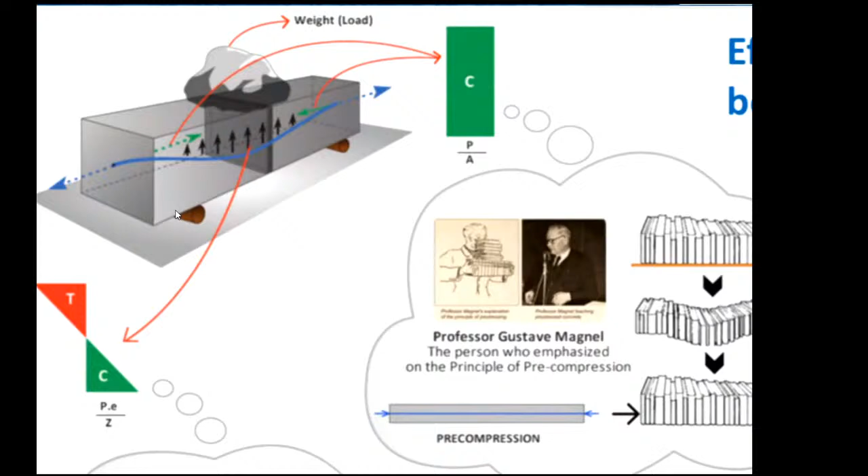Again, the same example with improved, or further advancement in the conceptualization. So here you can see the same beam, and what we are seeing is a blue line. That blue line is nothing but a cable, or you can say pre-stressing cable or pre-stressing wire. Let's understand that part.

So let us understand first this part. This is nothing but what is known as pre-compression.

In pre-compression, what is happening is, let us understand with this example: you have a stack of books like this. There is a bottom platform, and on that platform, the books are resting. If we remove the bottom platform, the book will not be under equilibrium condition, and it will fall down.

So the other option to keep the book in place is to generate a pre-compression in both directions of the book stack, such that there is internal cohesion between the surfaces of the books, and it holds its position. That is the meaning of pre-compression, or the concept of pre-compression. So you are getting a benefit of having pre-compression in your member in this direction. So that is one part.

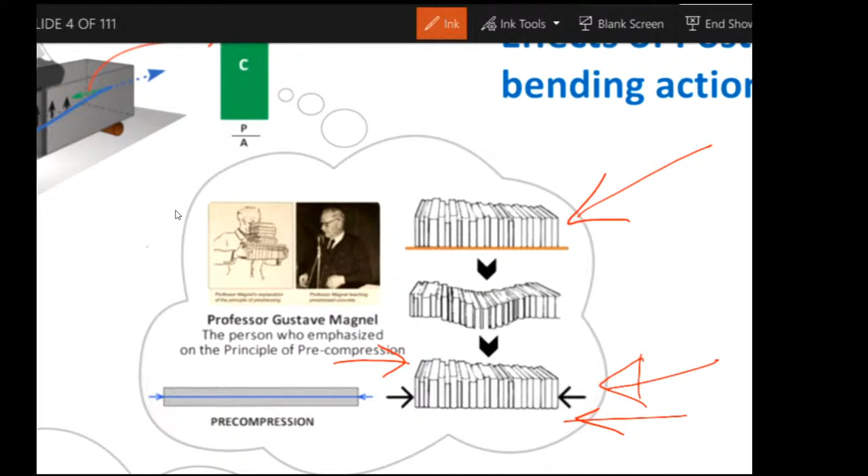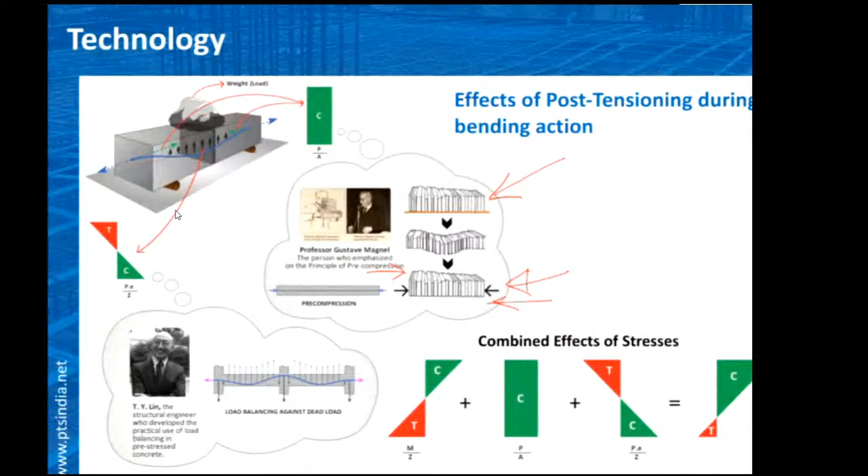Actually, this concept was materialized or thought of by Professor Magnel, and that was the initial first step of pre-stressing. The second step of pre-stressing, or further advancement in the conceptualization, was developed by Professor T.Y. Lin, and he developed the load balancing concept with the same cable.

If the cable is straight, we are getting pre-compression. If the cable has a certain profile, like what you see here, what happens is you are getting additional benefits. When the cable is stressed from both ends, the cable will try to straighten up, and it will start inducing force in this direction.

And again, there is a beauty of that force: it helps us in resisting the gravity forces. Gravity forces are always acting downwards, and the part force of that cable action is acting upward, so it can balance the gravity forces coming on the beam, and that helps reduce the net effect. Again, it has the benefit of reducing the stresses as well as the deflection in the beam.

So now altogether, let's see the entire scenario. What is happening is we are getting this P over A, that is pre-compression through this action. We are getting these kinds of internal actions through this P by this weight balancing action.

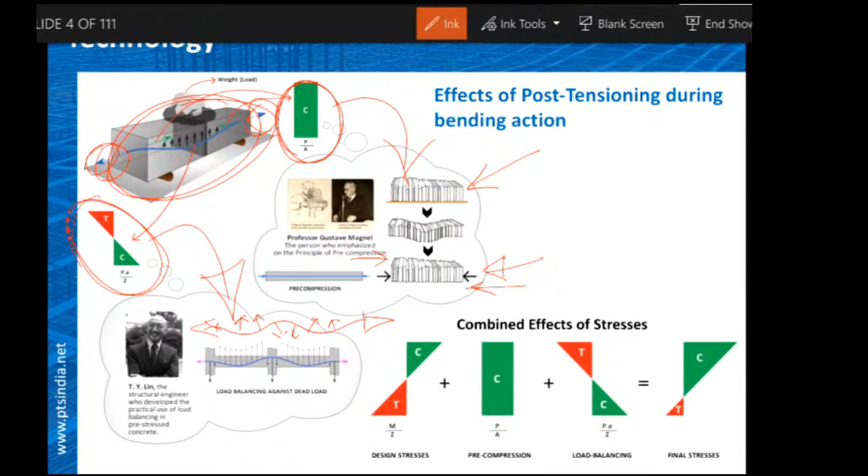Ultimately, what is happening is you can see these are the pre-compression forces. The green arrow is the pre-compression forces. The black upward force is nothing but the weight balancing forces.

So altogether, if we sum up, this is the design stress we get from the loads, or you can say vertical downward loads on the beam, that is moment divided by sectional property Z, or section modulus, wherein you have tension at the bottom and compression at the top at mid span of the beam.

The additional action you get from pre-stressing is pre-compression, like this is the direct stress. Direct stress is nothing but pre-compression force divided by the cross section area A, plus you get the load balancing or weight balancing stress, that is the pre-stressing force into the eccentricity, divided by the sectional property Z.

So in a nutshell, if we sum up the internal actions, the final stress diagram could be like this, wherein you'll have more of C and less of T. Now here you can have control over T and C both, tension and compression forces or stresses in the beam. Here you can make this tension force zero.

You can have the entire section under compression. You can limit this T to your codal provisions and whatever is acceptable by code. You can control the amount of tension accordingly.

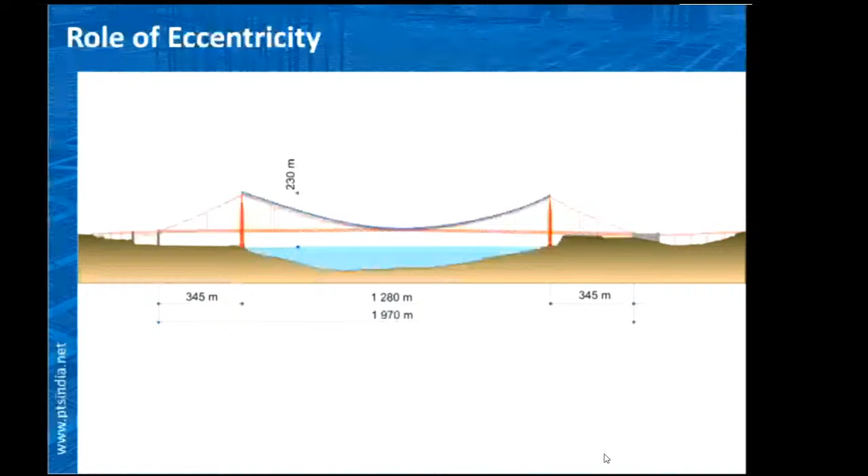So we'll go through this bridge, we'll study some aspects of this bridge. Here the bridge has two piers or pylons, two supports. You can see one is here, another is here, and the span between these two supports, the clear span, is around 1.28 kilometer, or 1.3 kilometer roughly.

Now here, to achieve this unsupported span of 1.3 kilometer, they had to go with a height of this pylon around 230 meter from the mean sea level. So why go with this much height of pylon? That is a question, right?

So actually they wanted to achieve this eccentricity of 150 meter. That was the case. So to achieve this 150 eccentricity of this cable, that is required, or that is the optimized eccentricity, and to achieve that, they had to go with 230 meter height of the pylon.

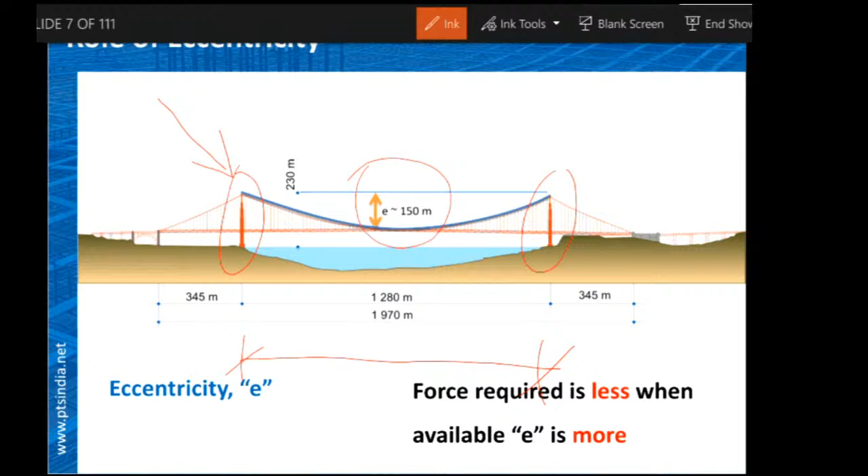Now, what is that? So the height of eccentricity can be realized with the height of a 50-story building. So eccentricity is 150 meter. If you consider 3 meter per story, it is around a 50-story building, just the eccentricity.

And if you think of 230 meter, the height of the pylon, it is more than that, maybe around 75-story building. So why go with that 75-story building height of pylon just to achieve this 150 meter eccentricity? So this is the essence of this bridge, to have this eccentricity. And why this eccentricity? Let's study more on that.

I'm keeping the same eccentricity or same cable, and I'm turning now towards building applications of the same concept.

Now you have a beam, same kind of structure, you can say - not exactly the same structure, but same analogy. Here the same kind of eccentricity, curvature, or profile of the cable is generated in the beam. You have two spans, a particular span and two supports here and here, and maybe you have continuity, right?

So now you have this kind of cable profile, and you know why the eccentricity is required. In case of a bridge, we went up to 150 meters in height of eccentricity. Now the same is not the case in a building, right?

Say this is a beam or slab. Now the client, or we, want this eccentricity, or ultimately the total depth of the member, to be as minimal as possible, right? So if you want to make this as minimal as possible, what happens is we are getting less eccentricity.

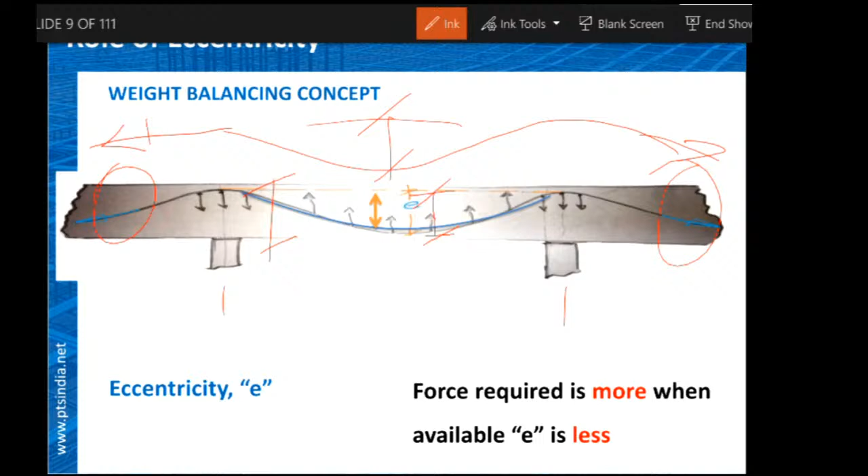And if we are getting less eccentricity, what happens, or what do we need to extend, or what are the limitations in that case? Let's study that part.

So here, a simple experiment - we may have this tool or setup in our laboratory, wherein we have a blue color cable, not elastic, but a flexible cable. And with that cable, there is a pulley here, and you are tying some weight to that cable, right?

And then you are having some weight at the end of this string. So to balance this, to make this system under equilibrium, with this kind of load or force in the cable, and with this kind of force or weight on the cable, there is a certain amount of eccentricity that is set to make it under equilibrium.

Now, what if we need to reduce this eccentricity? The only way to reduce it, since we have a fixed amount of weight, is to add on some more force over here. And if we can have some more force here, then the eccentricity can be reduced. So let's see that.

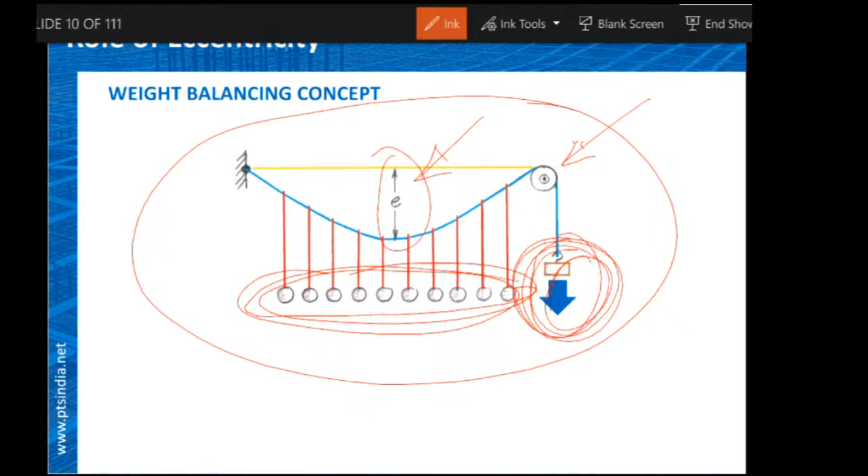So this is the second case, wherein we can reduce the eccentricity by providing more force in the cable, right? So actually what is happening is we need more force in the cable, or maybe we need more cables, to reduce this eccentricity and to minimize the overall depth of the beam or slab.

So that is where eccentricity plays a role. Higher the eccentricity, higher is the load balancing force generated by a cable, and lesser is the force required in the cable. Whereas if lower is the requirement of eccentricity, lower can be the load balancing force, and to make it higher, the force in the cable must be higher. That is how the equation should be.

So now you have the clear picture about all the aspects of the system, or prestressing system. Now,

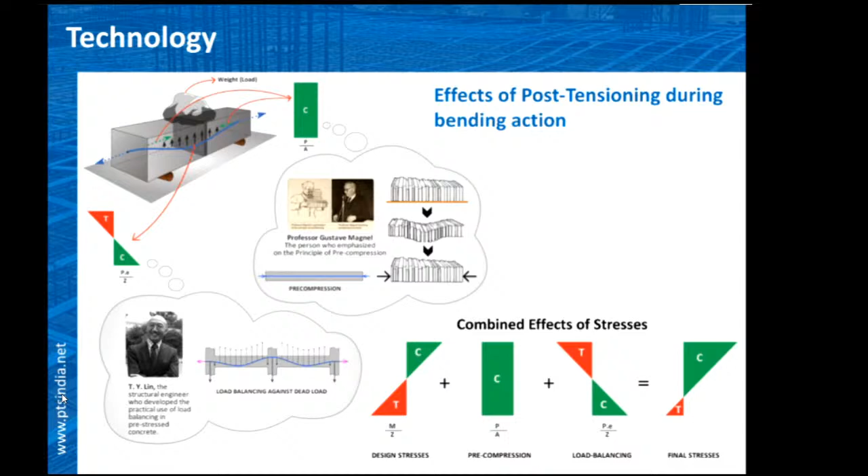there are two kinds of prestressing systems. One is known as pre-tensioning system, which is nothing but you are stressing the cable, or applying the force in the cable, before concrete is cast. That is the meaning of pre-tensioning - you are tensioning the cable before concrete is cast.

The second one is post-tensioning system, wherein you are stressing or pulling the cable, applying the force in the cable, after concrete has reached its desired strength. So after the concrete is cast and poured, we need to wait for certain days, and after the concrete has reached its desired strength, we stress the cable - the force is applied to the cable after casting. So this is the basic difference between pre-tensioning and post-tensioning.

Pre-tensioning has its own limitations of dimension of the elements. It is generally used in short size elements, and generally used in a controlled environment where you have a high strength, high force resisting system, because you don't have concrete to resist the force. That force, when applied without concrete present, must be resisted by some other strong system, which may not be feasible to achieve on site. That's why pre-tensioning is generally factory made or carried out at a controlled place. But that is not the case with post-tensioning system.

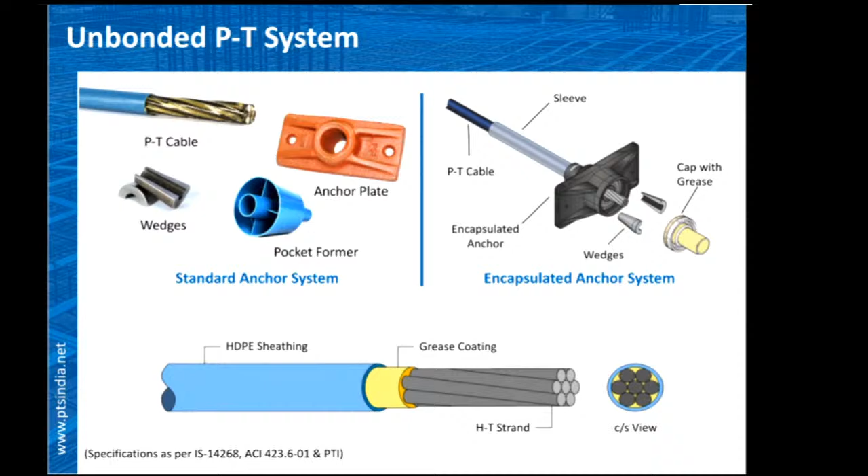These are the nuts and bolts of the unbonded PT system. There is a PT cable, an anchor plate, a pocket former, and wedges. All this sums up the anchorage system, and this PT cable runs throughout the member, either a beam or slab. This is known as the standard system, whereas there is another enhanced system known as the encapsulated PT system, wherein everything, even the metal part, is covered with plastic polyethylene or polypropylene sheathing, or encapsulated throughout. So nothing, no metal part, is exposed, and everything is covered with plastic sheathing. It is known as the encapsulated PT system.

Below is the structure of the cable. More precisely, the cross section view is like this, wherein there are 7 wires made from high tension steel grade, with a grease coating on it. This grease has two properties predominantly: one is to protect the cable from corrosion, so it's an anti-corrosive grease, and it also allows the sliding of the cable while stressing, reducing friction. So it protects the cable and provides less friction while stressing. On top of that, it has an HDPE sheathing.

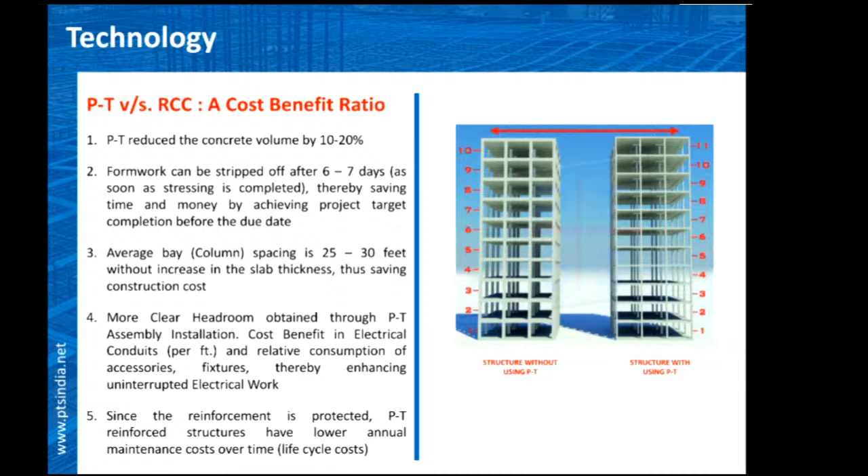Let's discuss the brief history of post tensioning. In 1886, the first patent was issued to P.H. Jackson of San Francisco. Then in 1928, Freyssinet tried to play with this concept, and used high strength wire and concrete, starting this in France. Then in '39, the same person improved it further, trying conical wedges and special jacks, developing something to anchor the wires in 1939.

Then there was a red dot in history: World War II, during which there was a wastage of steel infrastructure. Everything was washed away, even buildings, roads, bridges. After World War II, there was a huge demand for reconstructing infrastructure, buildings, roads, everything, while the metal had been wasted carrying out the war. So there was again a scarcity of material and a huge demand for making these structures. That's why post-tensioning came into the picture again, because it was actually saving material.

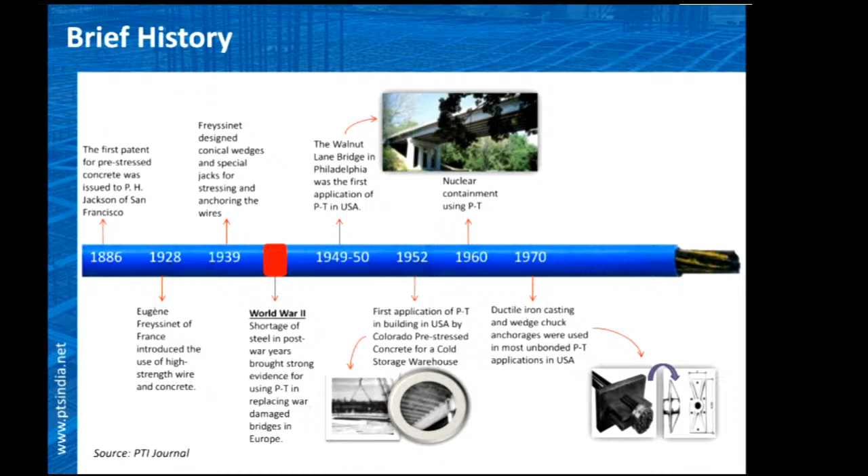In the 1970s, there was a development on the metallurgical engineering side in casting, which helped us make an efficient anchorage system by casting. In 1976, PTI was formed in the USA. This Post Tensioning Institute is a regulatory body that makes criteria, standards, and specifications related to post tensioning. We are following this PTI body in our system.

These are some of the state-of-art developments, many of which I have already discussed. One of them is that specifications were made for the unbonded PT system, so it is a well-specified system. The second is the system of extruding plastic sheathing. Whatever structure of cable you see right now is the same thing - the extrusion of plastic sheathing around the greased strand was developed to have this kind of extrusion system.

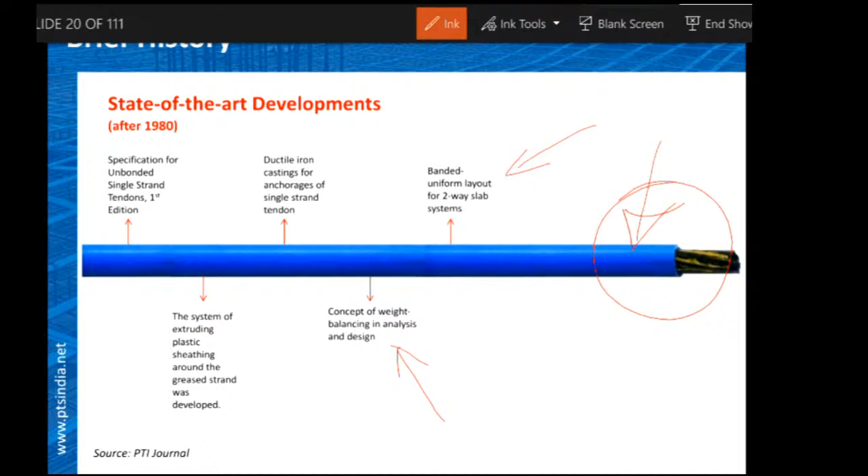Then ductile iron casting on the metallurgical side was developed, which helped in preparing an efficient anchoring system. Then the concept of weight balancing - we'll see this in one of the forthcoming slides. Banded and uniform systems - we'll also see this in some slides. Then computers came, and they excelled our analysis and design compatibility capability, as well as efficiency and speed. And finally the encapsulated PT system, which we've seen to work against corrosion.

So this is how it looks like. This is a typical or schematic layout of an unbonded PT system, wherein part of this is already cast with the PT system, and there is a construction joint here. After that construction joint, this part is yet to be cast. The laying of PT is already done, some steel is also there, and this cable is coming out from the already cast portion. This cable is also coming out from the already cast portion. There are cables in the cast portion like this.

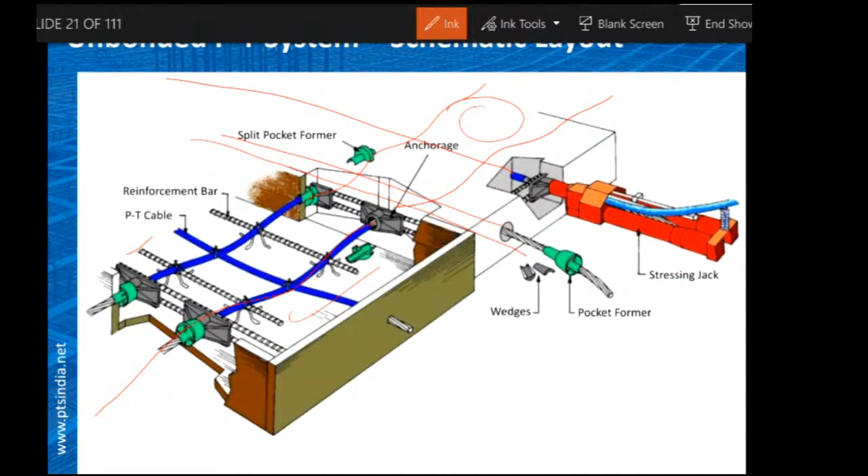So now, after having sufficient strength of the cast concrete, we are preparing it for stressing. We remove the pocket former, apply the wedges, and then apply forces through this stressing jack, pulling them out with a certain amount of elongation and a certain amount of force, and then they are self-locked with the wedges once the force is removed. So inside there is a force in the cable, and after stressing, we cut this excess length of the cable, and everything is flushed in. Nothing is taken out of the face of the slab.

These are the real photographs of the system. If you see this, this is the side of the slab or beam. This is a pocket former. This is the anchorage, and the cable is taken out. This portion is for the stressing part. Once the stressing is done, this portion will be cut. You can see the yellow part in this - this yellow part is nothing but the grease. This is the inside view, and you can see these are the cables.

The group of cables are separated out at the anchorages, and then every cable is treated individually. That is why it is known as the monostrand system - each cable has its own anchorage system associated with a single unit. That is why it is known as the monostrand system.

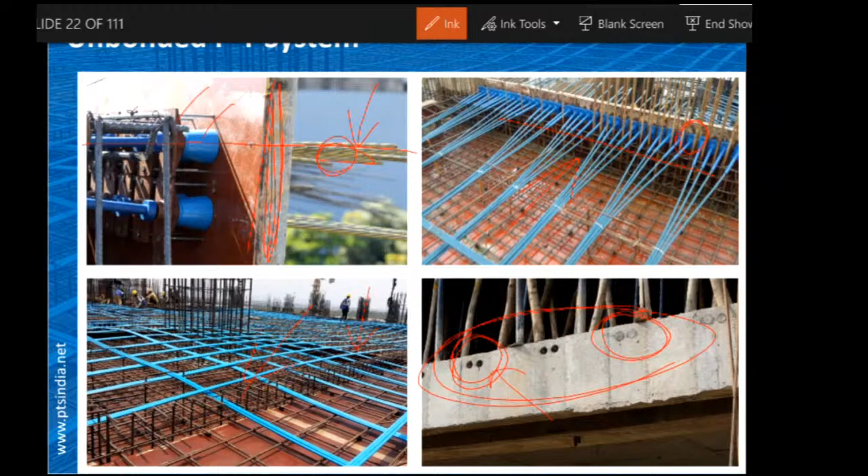Let's see some of the applications in residential projects.

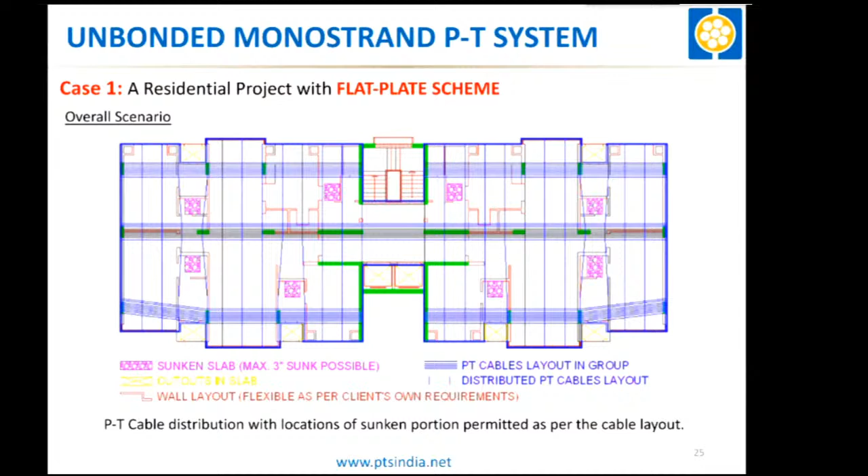So here in this scheme, this is a flat plate scheme wherein you may be able to see the perimeter of the slab, and whatever green part you see, these are the supports. You can see these are the supports, here also there are supports. So the green part is nothing but the columns or shear walls, or you can say structural walls.

So here actually there are very few beams. Maybe there is a beam here, there is a beam here, like that. So the beams are placed in such a way that they are not hindering the ambience, or you can say the space or working space. There is no beam inside this portion.

So it's only a flat scheme, and you can see the laying of the cables being done in a distributed and banded scheme. So horizontal cables are being laid in a group, and vertical cables are being laid in a distributed way, with uniform spacing or something like that. So this is a uniform and distributed cable layout.

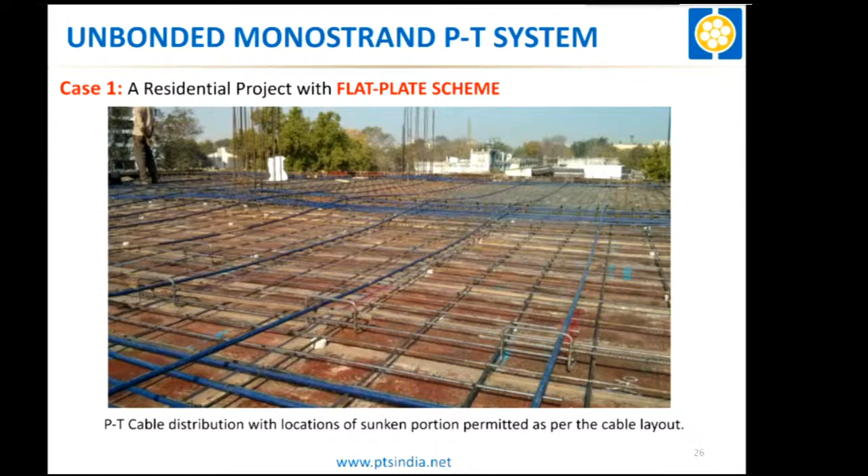So here you may observe that the cables are at a high point here, then again a low point here, right? So this is a high point, again low point, like that. High point, low point, like that, and this cable also high point here and low point here. So these are the cable profiles required as per the site, as per the design requirement, and this helps us in inducing the weight balancing as well as the pre-compression from both the ends.

This is the project wherein the floor to floor height was 10 feet, and you can see that the support and slab directly, there is no beam.

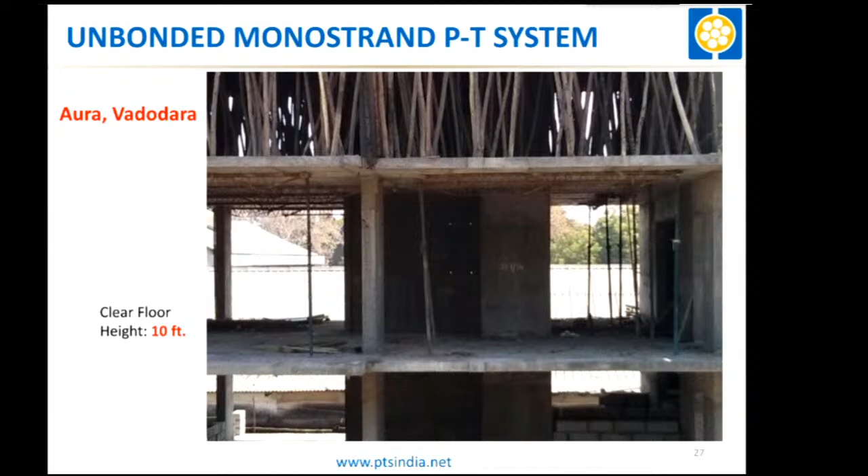The other is flat slab with column drop panel. This is another scheme which may be used in commercial or residential projects as well. As you see here, there are drop panels like this, surrounding the column, and there are a few beams here. So the beams are as per the requirement of the structural consultant.

We are working with the structural consultant. We only concentrate our design on the post tensioning part, and the other part is taken care of by the structural consultant, like columns and beams, maybe RC beams, or shear walls and footing — all these things will be designed by the structural consultant, and horizontal members, PT members like beams and slabs, will be designed by us.

So here the span could be like 10 meter or 12 meter or 11 meter from column to column. To achieve that span in an RC case, the deflection will govern the design, and you must have the thickness so that the deflection is taken care of in case of RC. But in case of PT, you have the benefit of controlling the deflection — that is why you can reduce the depth of the slab and the depth of the overall floor plate.

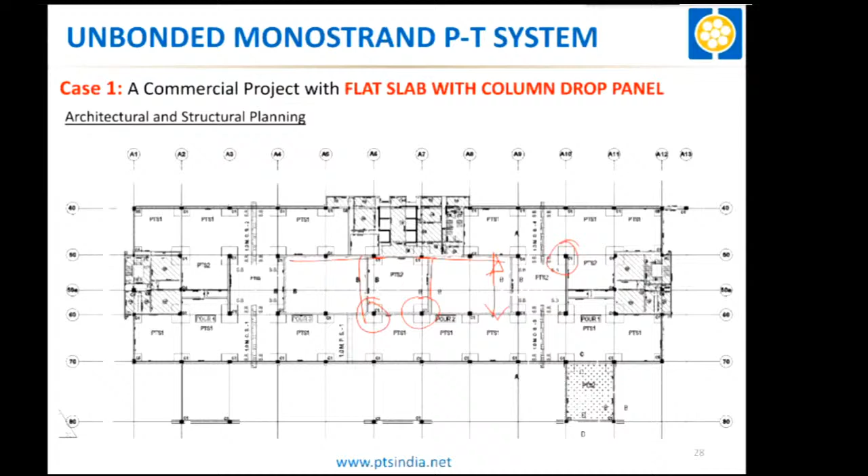When you have a larger span here and a lesser span in this portion, you may require more cables in the larger span, so we may put it like this.

This is once the casting is done, stressing is done, and when the shuttering is removed — this could be the scenario or the ceiling of the PT slab. This is known as flat slab with drop panel. You can now easily view the drop panels around the column.

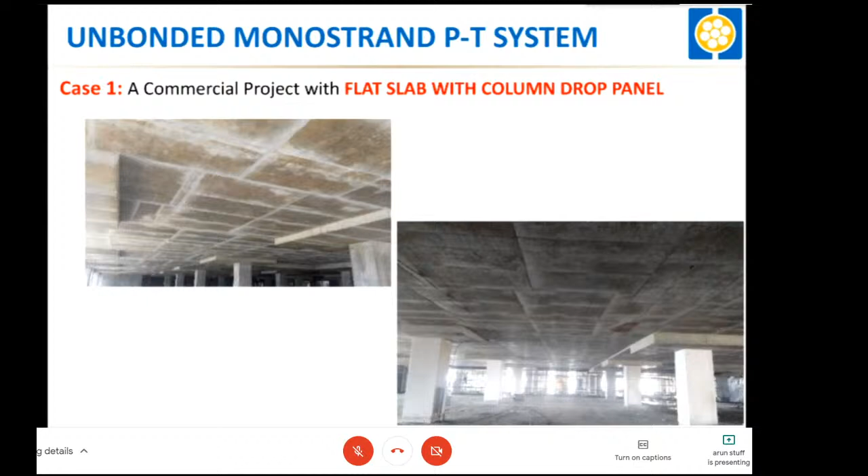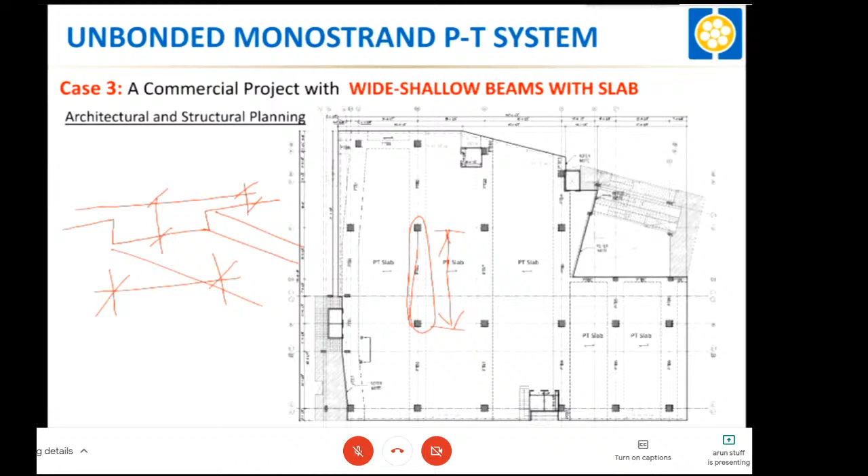This is another project wherein the client was having columns here. There were columns here, and the client approached us saying he wanted a better working space in this portion, but he did not have any issue with the height of the building and height of the beam.

So what we tried is to keep the same height of the beam that he was having with RCC and with these central columns. In RCC he was having a certain height of the beam. So keeping that particular height of the beam, we tried to remove this entire row of columns, and the client appreciated that, and we moved forward, and this project was materialized.

Now you can see the beauty that there is no column inside the building. It's the freedom of the client that he can make anything in this unobstructed area.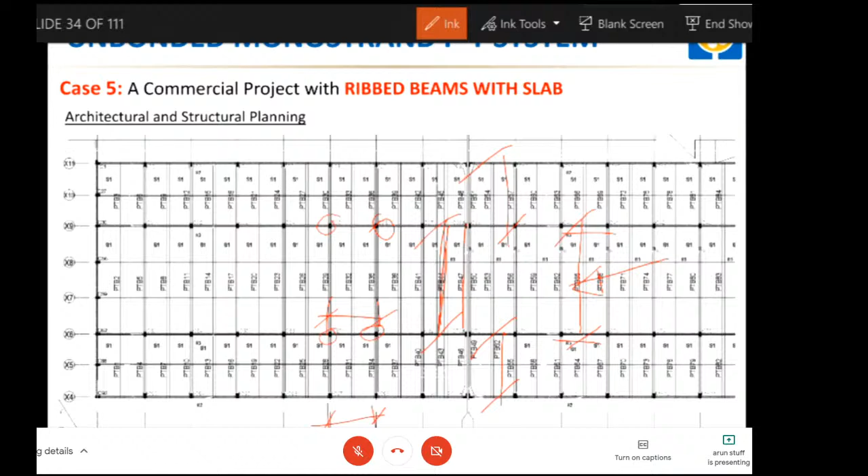This is a very interesting geometry known as a waffle slab. You can see these are the columns, so there are total 8 columns, there is no inside column, it is all columnless space. The span between these columns from inside to inside, or center to center, is around 124 feet, and here it is 120 feet. So it is 120 feet by 124 feet spanning.

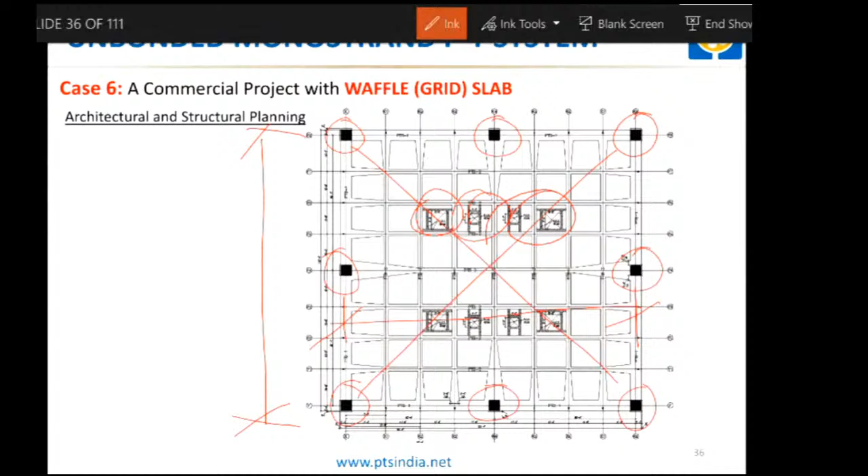And these are the cutouts inside the floor, or you can say the roof of this building. This is a very special structure, and it has already been constructed. It was actually the largest flat roof in the world, awarded by Guinness World Records, and it has that record of having the largest flat roof in the world.

And this is in Jaipur. It's just adjacent to the Govind Dev Ji temple, which is a well renowned temple in Jaipur, near the Hawa Mahal, just beside that. There is a Raj Mahal of the king of Jaipur, and it was managed by the king, and now it is managed by the government of Rajasthan.

They wanted to have this kind of satsang hall just near the temple, and the restriction was the overall height of the building. So they wanted to keep the overall height of this building lesser than the height of the temple, and with this span, they were not able to manage with RC or RCC. So then they approached us, and we proposed them this geometry, and it worked out, and then it went well.

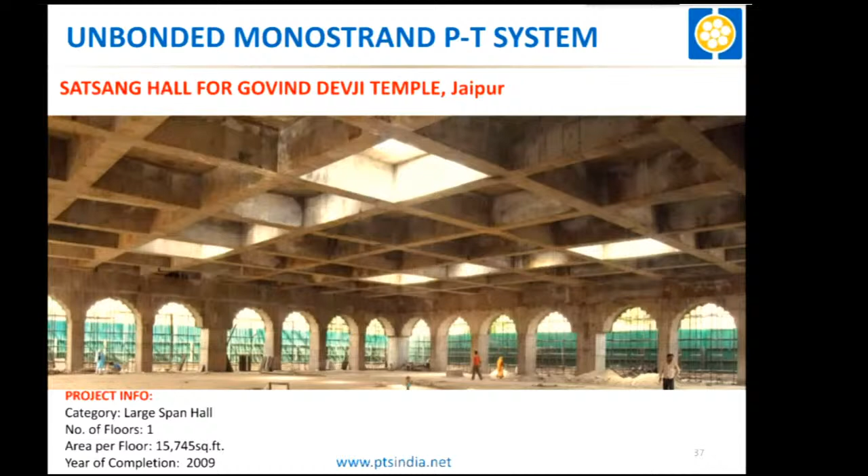So this is the image of the same structure. Now you can see that there are only 8 columns. Whatever else you see are the architectural effects only. This is the real column, this is the real column, this is the real column. These are not the real columns. These are just architectural aesthetic members.

So it is completed in 2009. The loading above this is like, it has a 500 kg per meter square load with which it is designed, so that even a gathering above this floor can be allowed. So it is designed accordingly.

Let's see some of the technical part. One of them is serviceability. What is the meaning of serviceability from a designer's perspective? So these are the points, the aspects we need to look after while designing the PT member or any RC or any member.

So one is the deformation or deflection. It should not be beyond the limit permitted by the code. Cracking as well, there is a limit, so it should be limited with that cracking part. If this cracking is limited, then durability can be managed by reducing the cracking. The other part, like impermeability, vibration, acoustics, thermal insulation, these are secondary parts, but these are being taken care of by some other agencies.

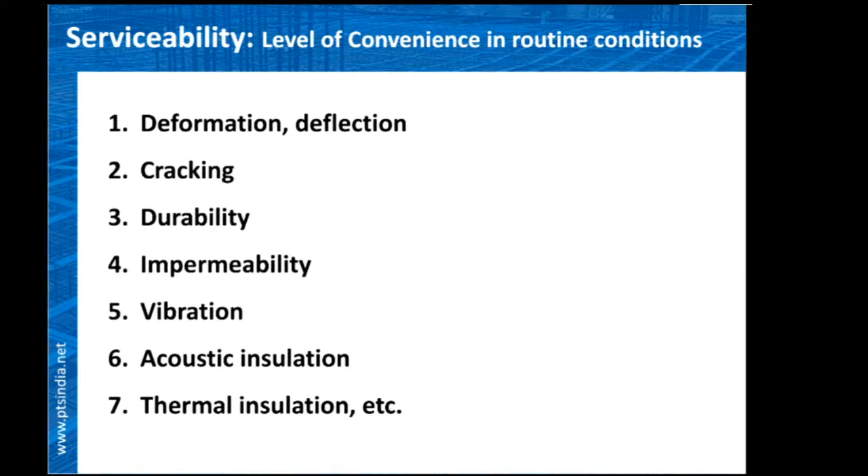So actually the serviceability is expected to remain effective throughout the life of the structure, because the structure should be serviceable enough so that it can be made use of, right? So to have this, structure serviceability criteria should be addressed while designing.

The other part is strength. As a designer's perspective, once the serviceability is confirmed or made sure, maybe we can go with the strength aspect later on. So in strength, its occurrence is very rare. So actually the serviceability or strength aspect arrives at the last stage of the member when it is about to fail. Serviceability parameter exceeds the limiting range.

Now in strength aspect, it is expected that now the structure is not serviceable. It should deform excessively. It should show the cracks, it should show the extensive deformation, noticeable deformation, so that we can foresee, or we can notice that it is about to fail, so that we can save human life.

So both are contradictory actually. In case of serviceability, we don't want the structure to get deformed. We don't want any cracks in the serviceability criteria. But in case of strength, we want that the structure should crack. It should show enough amount of deformation. It should deflect before it fails. So we need to design for both these extremities.

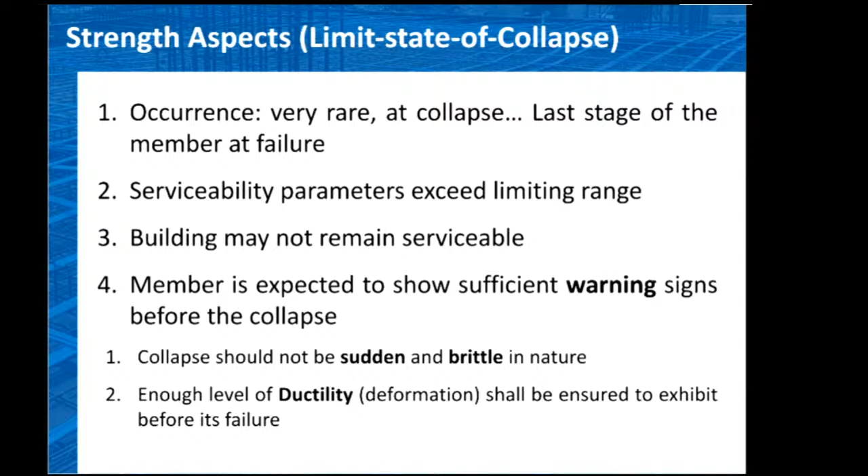So let us understand how to achieve both strength and ductility. So here, if we see the material characteristics, the characterization of the material, we are using HYSD steel. Initially, we were using mild steel. You can see here the stress versus strain diagram of mild steel. It is well known to us.

One step ahead is the HYSD steel. We are working right now with HYSD steel, which has more strength than mild steel. Right? So now we are working with Fe500 steel, that is here, and one step beyond, you can say, is the pre-stressing steel. So we are jumping from this to somewhere here, 1860, right?

So we are gaining much as far as its strength is concerned, but we are losing something as far as its strain is concerned. So here, the strain aspect is this much only. So strain has a relationship with ductility. If your reinforcing steel has more strain while failing, it will add ductility to the overall structural behavior.

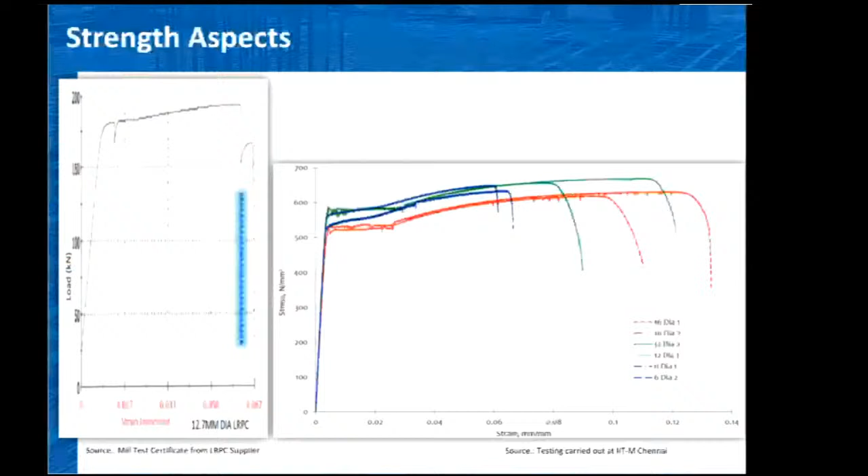So here, actually, we are losing the strain aspect or ductility aspect while using the high strength material. Let's compare both things: one is the stress versus strain diagram of PT cable material, and this is the normal reinforcing steel, HYSD or maybe 415 steel grade, stress strain diagram.

So the peculiar thing is, this strain when PT fails is hardly 0.06. It fails here, but our steel goes up to maybe double of that, 0.12. So we need to make sure about that, and take care of this part in our design. What is the resultant effect of this kind of strain characteristics in the overall scenario? These are the combined graphs of PT as well as normal steel.

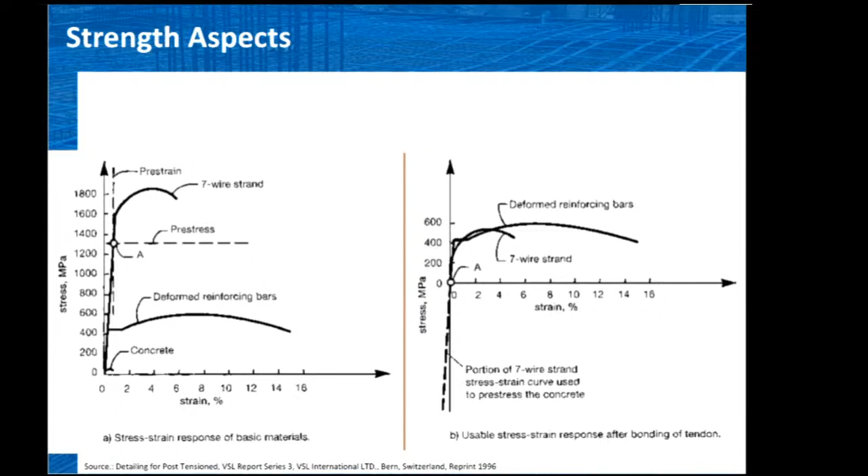Let's understand this part. If it is a bonded PT system, then the prestressed tendon is bonded with the concrete, as well as the reinforcing bar is also bonded with the concrete, and both will be at almost the same level, nearby the tension face. So in case of strain compatibility, everything has the same strain level at a certain level of stress, or at a certain depth of the member. So in the mid span of the beam at bottom, maybe the cable, reinforcing steel, and concrete will have the same strain level. They will have different stress levels but the same strain level. That is the meaning of strain compatibility.

So what happens when strain compatibility is there? When the strain increases to the extent at which the bonded PT cable fails, there is a sudden change in the transfer of force, and now the force experienced by the reinforcing bars is more, and there can be a sudden failure of the structure. This case is expected in a grouted PT system.

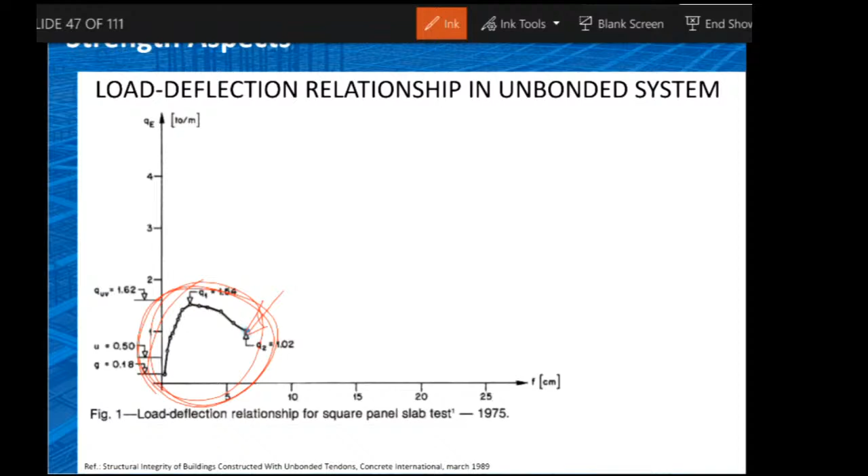In case of an unbonded PT system, the beauty of making it unbonded is like whatever you saw in the last slide - this is the same thing here. This is the stress strain diagram of a bonded PT system, wherein it fails in this portion. But in case of an unbonded PT system, it goes further before it fails - it is about to fail at this point. The strength part is very, very high, as well as the deformation part.

So this behavior is known as catenary action. You can search on Google regarding catenary action of unbonded PT systems, and you'll get to know how beautifully it can help us achieve ductility as well as a greater amount of strength. So the ductility part in unbonded systems is what we saw right now.

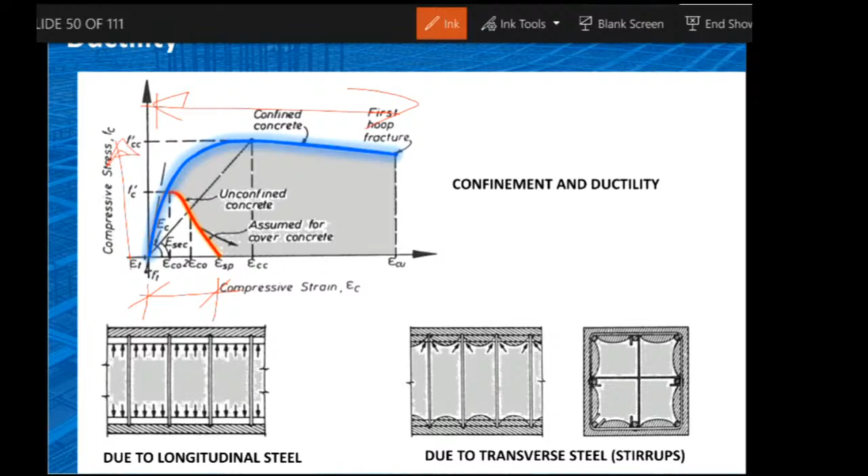But in a general scenario, ductility can be managed by confining the concrete. This graph of stress versus strain shows the behavior of unconfined concrete - just watch the strain part, it is this much when concrete is unconfined. But when the concrete is confined, this is the graph. It improves a lot as far as strength is concerned, and as far as strain or ductility is concerned - you can see it is enhanced just by confining the concrete.

Confinement can be achieved with the help of longitudinal steel, and more so with the help of transverse steel, that is nothing but the stirrups. By having a good amount of stirrups well specified in accordance with the ductility code, IS 13920, we achieve a good amount of ductility required to take care of the lateral forces. So that can be managed with the help of this kind of steel.

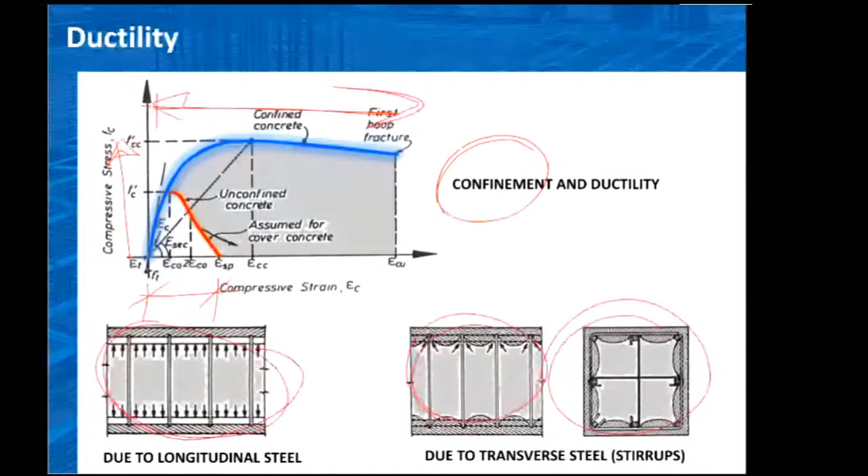Now let us think all together and superimpose everything. So this is the scenario - these two thick black lines represent the envelope of the moments, wherein the midspan portion is controlled by gravity moments, whereas near the column-beam junction, there is partly a gravity moment as well as lateral moments.

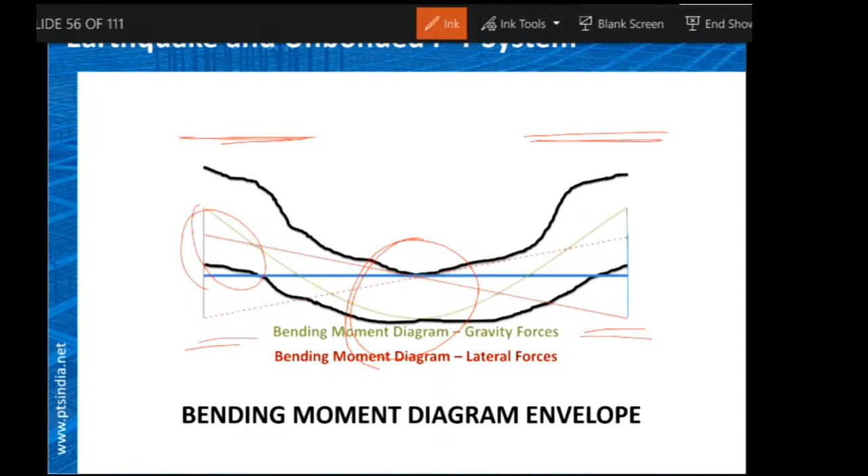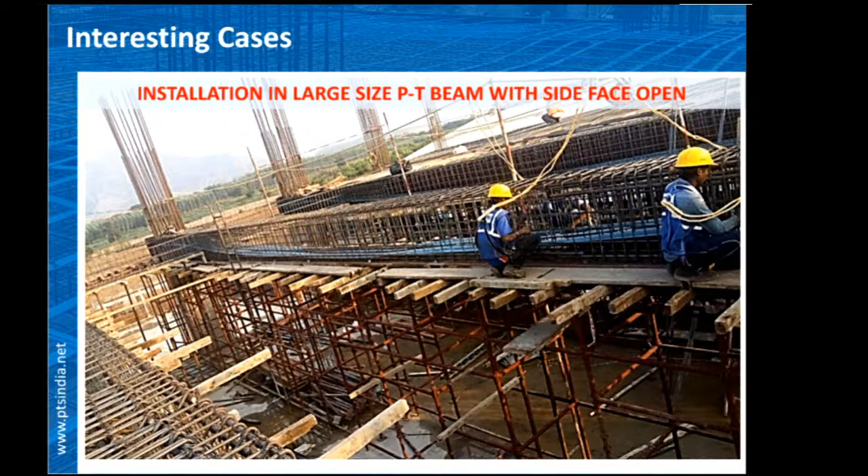This is the installation of an extra large size PT beam. You can compare the height of the beam with this person - it's more than the height of the person. Also, you can see the cable profiles - these are the profiling of the cable. Actually, this project was in Baroda, and this is Nilambar, one of the projects of Nilambar, near Vasna Bhayli Road, Nilambar Circle, where there is a Hyatt Place Hotel.

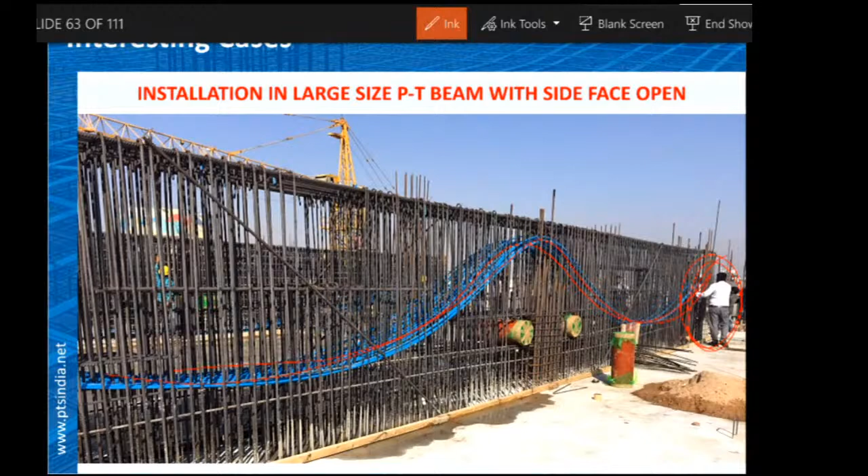This is a project of Nilambar Triumph, wherein they had a transfer of structural systems from one of the floors above the ground floor, maybe around the 6th or 7th floor. They wanted a different structural scheme above this level. So this is a transfer level, and this is the transfer beam, wherein certain columns come onto this beam and are not going below it - transferring the force from those floating columns to the main columns from this particular floor. You can see the end of that beam, where a series of anchor plates are arranged with a particular profile.

This is the same beam after having cast and stressed, and the cables are cut. Now it is about to fill the recess, these black pockets. Once that is done, everything is over and you can move forward. So this is how it looks like afterwards.

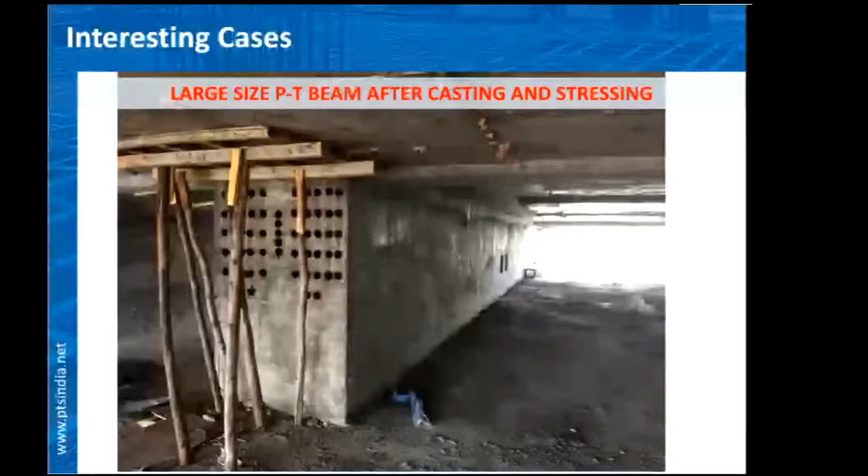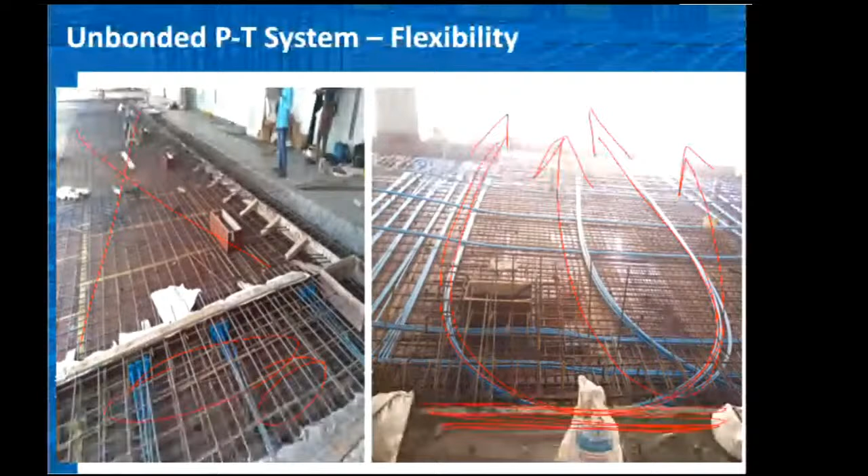This cannot be done with other systems like bonded, because they have a flat duct, and that duct cannot be bent in this horizontal direction.

You can see the other views. The cables are being laid in this direction, and these are actually stressed from this side. So it is a very flexible system.

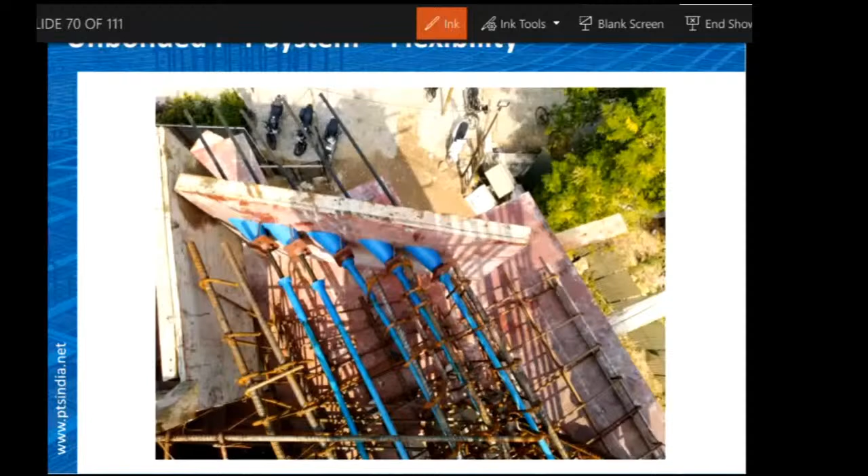You can see some of the images. Here also you can see that the face is not orthogonal to the cable - it has an inclined face. So again, the cable force is in this direction, right? You can see that there is a mechanism to take care of this inclination in this system.

Now, extending a PT beam - you already have a PT beam, and if you want to extend it, these are the PT beams. This is a project of Hiranandani in Mumbai. They wanted to extend the PT beam after construction, after having it all done. So we make them extend the cables by providing a coupler. You can see that coupler - these are the old cables, and these are the new cables, joined by this coupler. Then we can move forward for the extension of the beam.

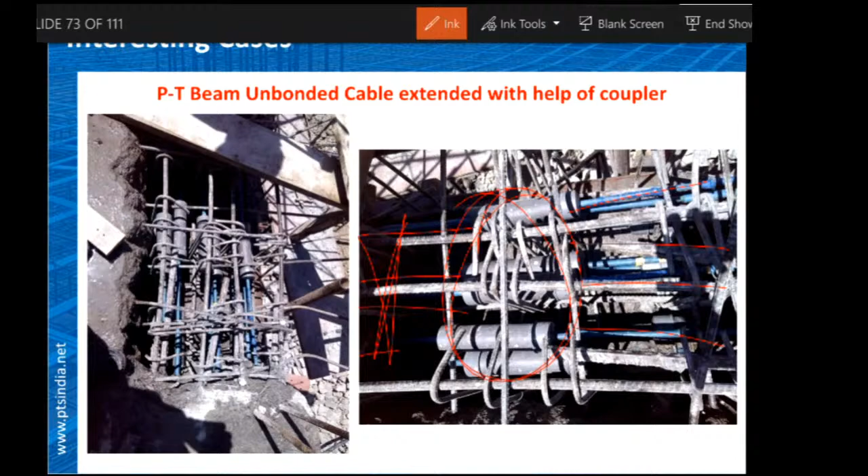Trimming of PT beam - a PT beam can be trimmed once it is done. In this geometry, these are the PT beams. You can see there is a cantilever on both sides, and the cables are actually anchored in this space. Now the client wanted to trim this boundary of the building from this face to this face - it was around 200mm, 8 inches, sorry, 500mm.

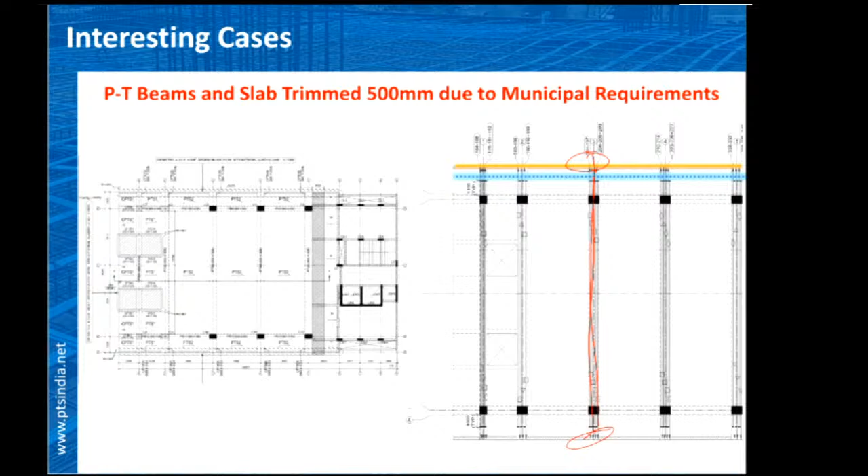They wanted to trim this 500mm because of municipal requirements, and once it was decided, it had to be executed. So we trimmed these beams. You can see the anchorages - these are the anchorages before, and now those were to be brought to this level. So this was the original dimension, now it has been brought to this, and we made them work it out, and it was materialized.

Now, cutout in the PT slab. You can see small cutouts - this is not actually cutouts, but core cuts. The core diameter may be around 2, 3, or 4 inches, to take out the sleeves or to take out the services.

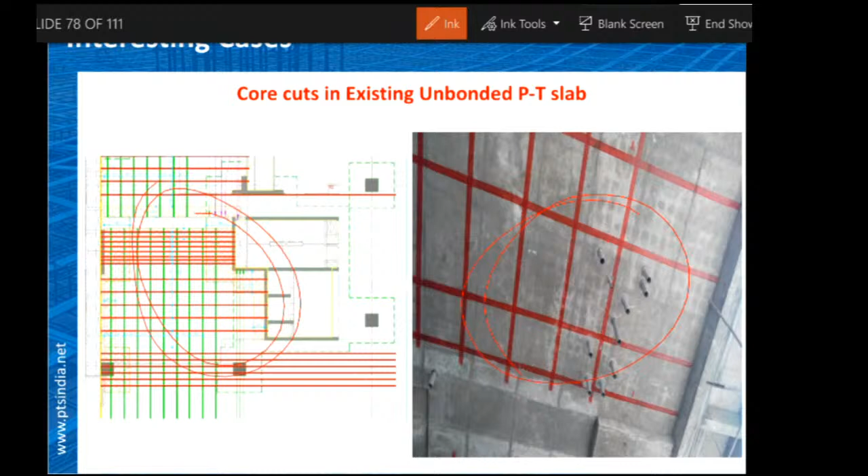You can see in existing PT buildings, the same diagram with the laying of the cable and the marking of the cable, and these are the cutouts. Same way here, these are irregular cutouts - the locations are irregular, but still we managed to get through these cutouts in existing PT buildings in our projects.

Then small cutouts, like 2 feet by 2 feet, can be easily materialized on site, but only with our permission. We check the design part with and without this cutout, and then we can approve it. Maybe we can shift the location of the cutout a little bit here and there, and we permit it, and then it can be materialized on site.

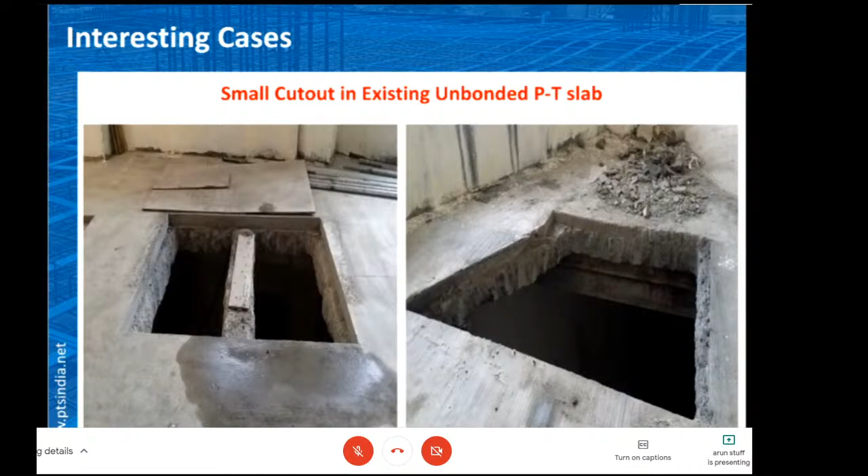Large cutout, maybe the size of 40 feet by 10 feet. This could be the size of cutout, and in that case, this is a large size cutout. 40 feet is not a small dimension, and it is in a PT slab.

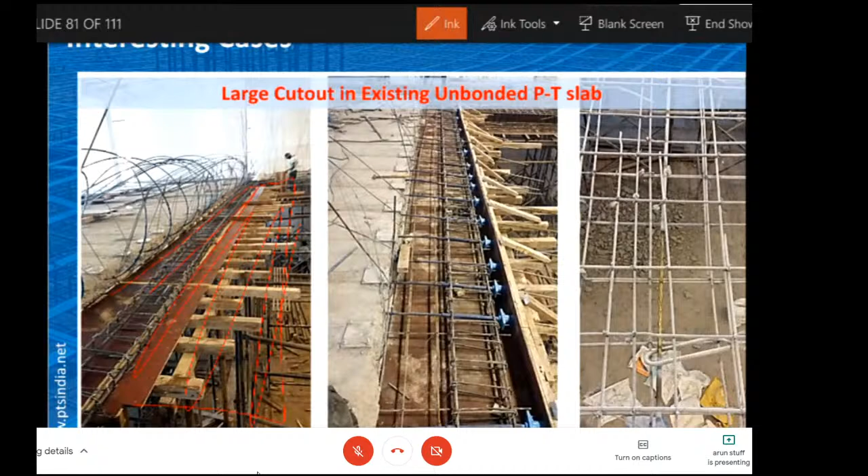So this face, you can see, is all cutout. This was the existing slab. Now it is cut, the concrete is removed, and these are nothing but the cables. Cables are managed like this, and this was the cutout. Slightly more than the cutout area is removed, the concrete is removed slightly more than the cutout part, and now this face is treated. This is the face of the cutout.

So the cables are being again anchored with new anchorages, and the cables are taken out like this. Then we also mark the cable. The status of the cable is good.

Actually, still you can say the grease is green enough, or you can say the grease is yellow, and it still has a good amount of lubrication after a year or so, because this decision was made after construction.

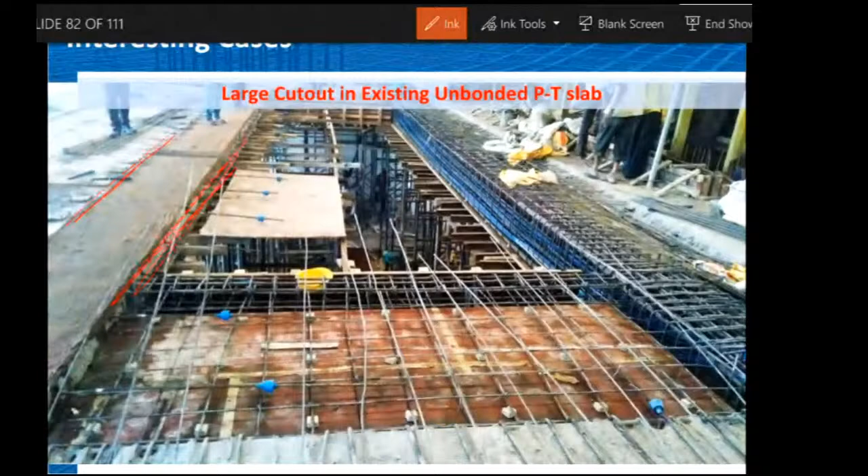After a year, they wanted to have this cutout. So this is phase one, wherein we remove the concrete. This is phase two, wherein we set up the end conditions. This is phase three, wherein this part is cast. You can see that part is cast, and then we stress from this end. This is the size of cutout. Now on this part, structurally there was a need of a PT beam, so we introduced a PT beam here because there was nothing to tie this part of the beam slab. So there was a PT beam in the existing structure.

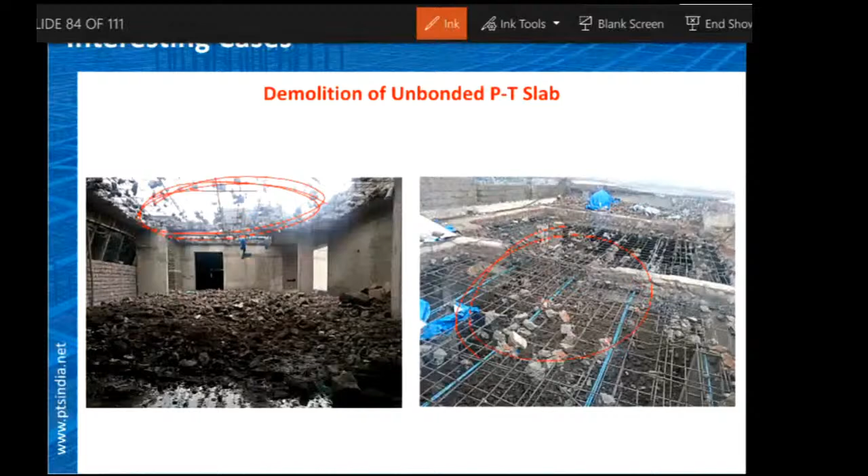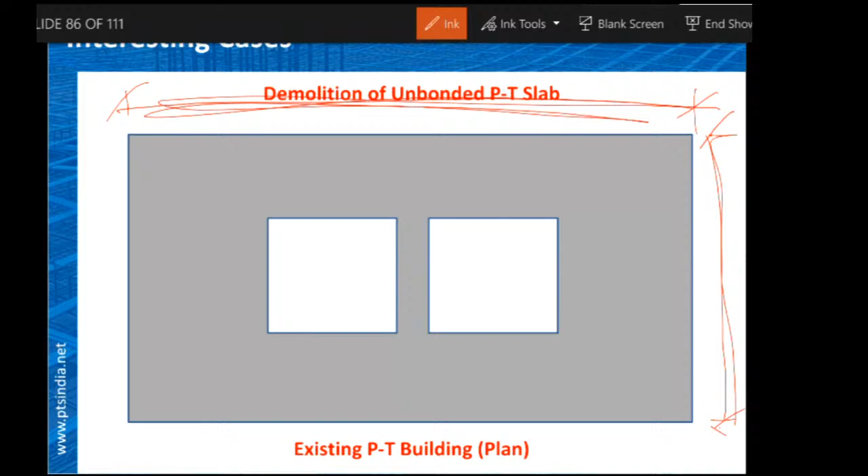Client wanted to remove this portion. This portion is to be removed, all the floors, maybe a 6-7 story building, and he wanted to have a different scheme in this portion, and he wanted to have this part intact. This part is to be kept intact in Surat.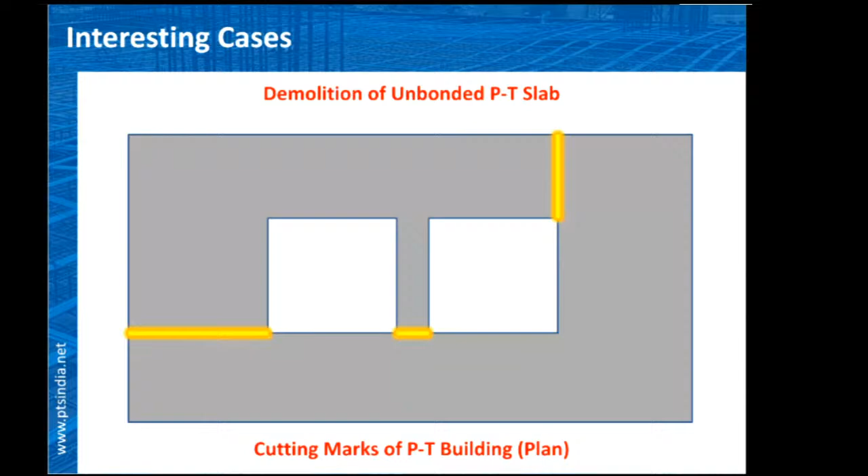So we suggested to them that this portion is to be demolished. Then these are the points to be treated before it is demolished, these are the separation points. So we treated them, and once it is treated, then the remaining part is demolished, and then there was a new scheme in this portion.

Let's see the photographs. These are photographs from Google. You can see that this was a project. There is a bridge, there are cutouts, and this is the project. The client actually bought this land afterwards, after construction of this building, and now he has changed his mind and wanted to demolish this portion. So he demolished this portion. It was all PT.

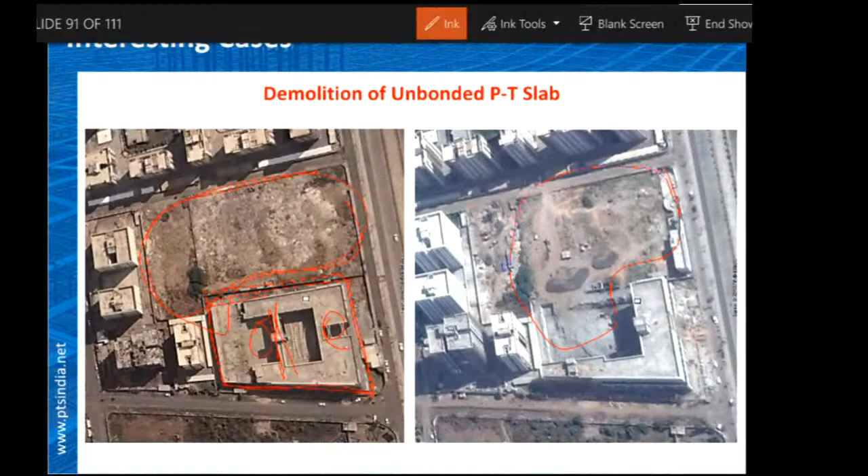Now the new scheme is there, right? So again, in the new scheme, we were there for construction of certain curve-shaped beams and all these things. So let's see the photographs.

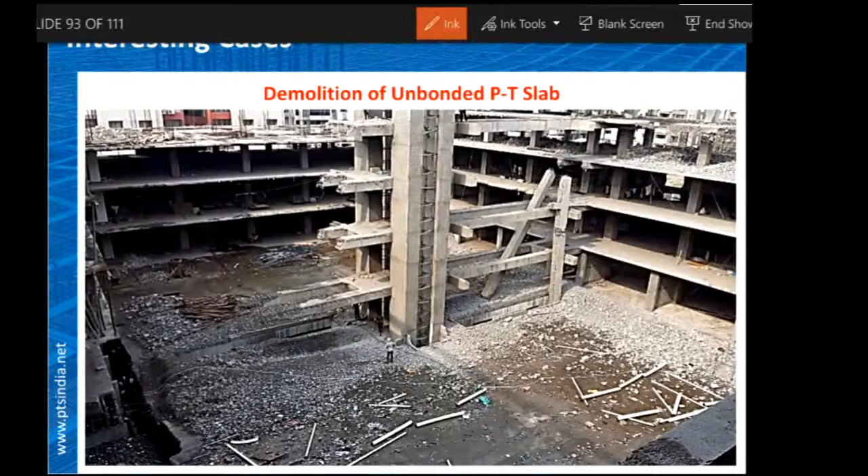So this is the interior while demolition. You can see the bridge, main middle bridge part. You can see some of the PT members are already being demolished. You can see the terrace part. You can see here, it is under demolition. You can see the debris and some members.

This is the connection point. You can see here the connection point is being demolished with proper care. These are under demolition. Again, here also you can see another angle of the demolition. Here also it is demolished, the connection part.

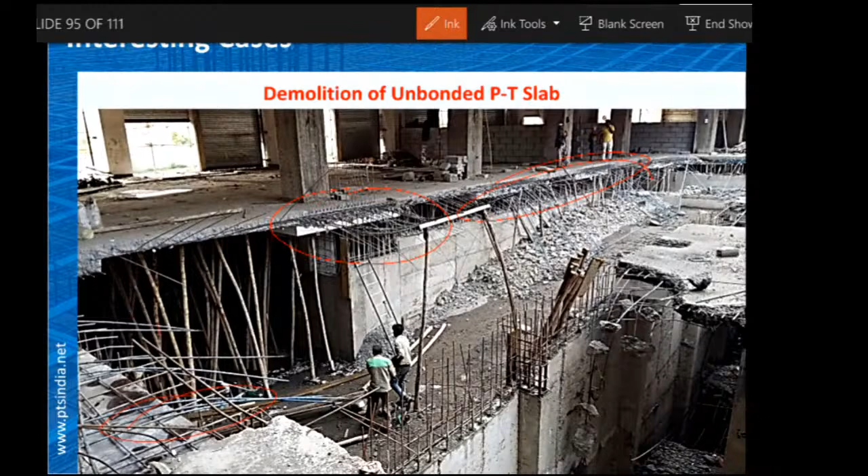We checked out the condition of the cable because it was around maybe more than 2-3 years since construction, and now this phase has come. So we tried to review the condition of the cable, but after 3 years, or more than 3 years, still the grease is proper without any aging effect, and it was good actually that it has served its purpose. The condition of the cable is still good.

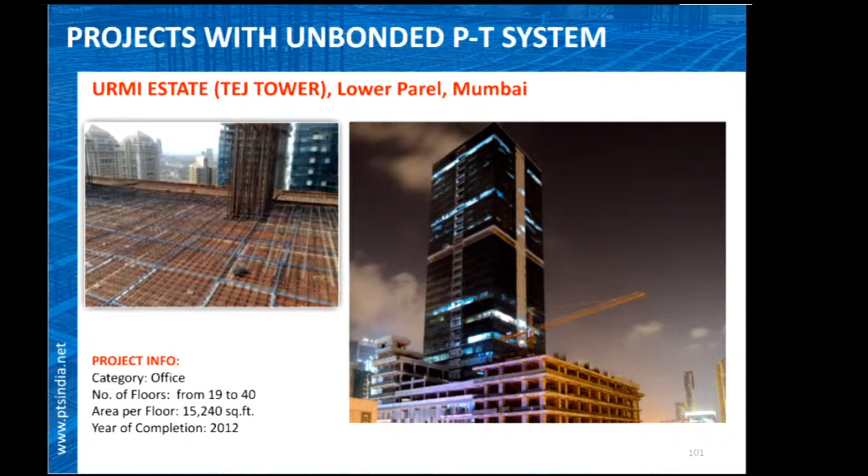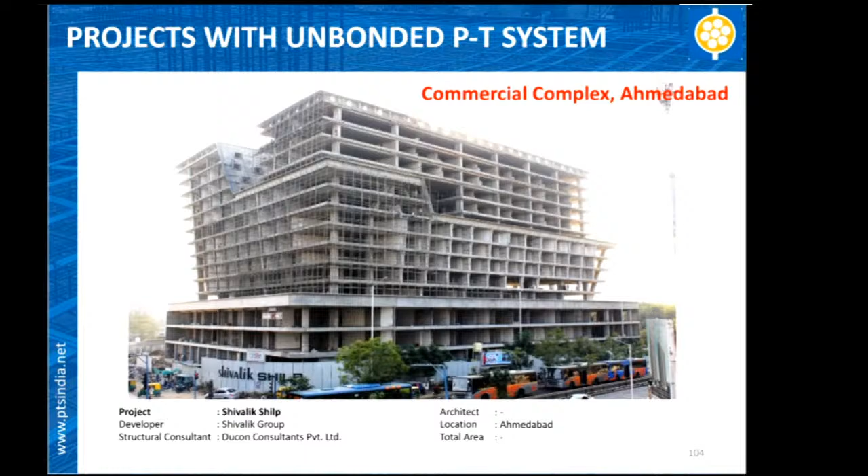This is a commercial complex for one of the leading developers in Ahmedabad, Shivalik Group. This is the Shivalik Shilp project near ISKCON circle in Ahmedabad. You can see some inclined columns, and it's having a floor plate PT.

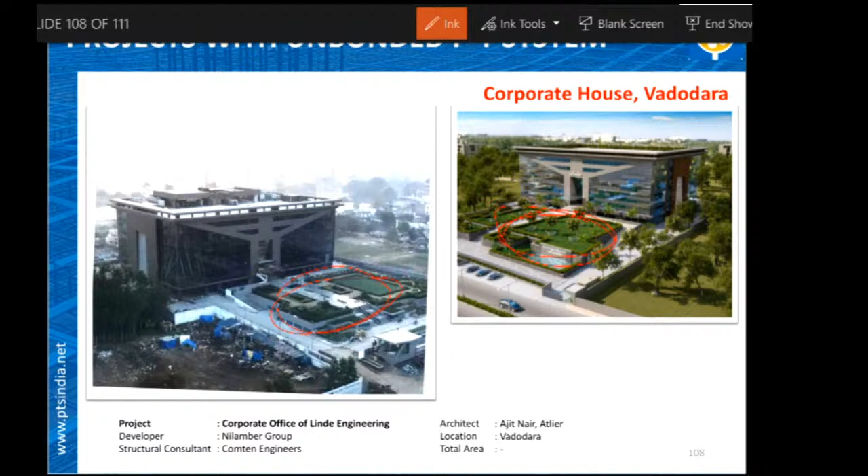This is a project for Linde, the new building of Linde Engineering in Baroda, nearby Nilamber Circle on Vasna Bhayli Road. It's done in unbonded PT. The special part is that this part is also underground - there are underground floors and parking floors below, with a huge load of soil and ground treatment, with undulations up and down, and it is done in PT.

Let's work on the rumors you may have heard about the PT system, especially unbonded PT, that you cannot drill or make openings in a PT slab. But as we've discussed, it's mostly possible using proper procedure - you just need to work out the proper procedure. Second rumor is that if you drill into a tendon, it will fly out of the building. We have never experienced such an event; it cannot be completely flown out of the building in any case.

Third rumor is that it is impossible to upgrade or repair a PT structure. We saw some slides showing there are ways to upgrade and repair a PT structure, but it should follow a well-defined methodology, and with that methodology we can do those things. Another rumor is that PT structures are not durable - of course PT structures are more durable, since you have better control over tensile stresses and cracks, hence you can achieve more durability with PT. Lastly, some say it is more expensive than conventional structures, but it is not; overall, it turns out to be economical and durable.

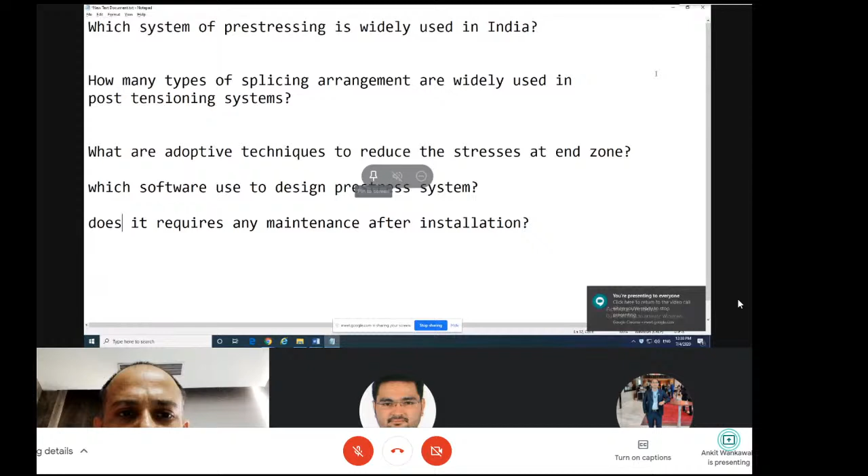Sir, it was a really nice and informative session. I think all the aspects were covered in this session. Still, we have some questions. The first question is, which system of prestressing is widely used in India?

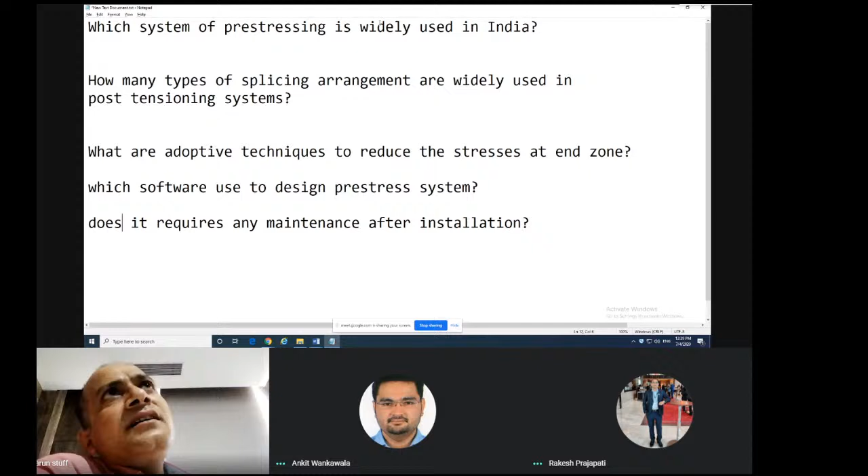Actually, to be more specific, prestressing has pre-tensioning and post-tensioning. In post-tensioning, we have been in the Indian market since 2006. Before that, the bonded post-tensioning system had already been present in India in the building sector as well, mostly used for bridges but also in buildings. Since 2006, we have completed more than 1,700 projects till now. So you can say people are now accepting this new technology and taking benefit of it. We have completed around 1,700 projects till now, so you can say it is now a prevailing system in building technology.

Sir, the next question is about how many types of splicing arrangements are widely used. Let me interrupt you - have you shared your screen? I'm not able to see it. Rakesh, sir, is it visible? Yes, it's visible to me now. Okay, no problem, now it's visible, I'll ask the question.

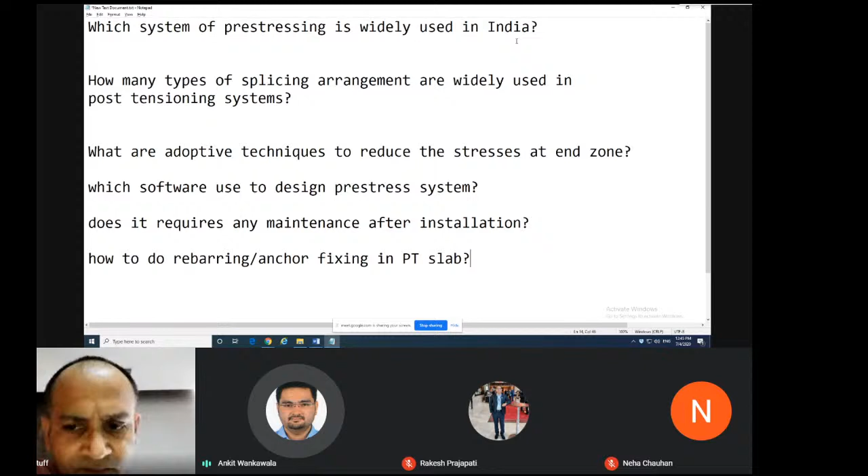One more question from my side. Nowadays most builders are using PT slab technique, and I have seen some cases where they are not able to achieve the minimum strength criteria from concrete. So how do we deal with these kind of cases?

In 2006 when we entered the market, I think you should take this in a positive way. Before this, what was the scenario of concrete when it was RC? When it's an RC structure, if the concrete is not good enough, not serving the design requirement with which the design was carried out - suppose the design is carried out with M30 concrete, and on site the concrete is not even M15 or M10 - what will happen to the structure? As you know site conditions, there are very rare cases where they measure the cube strength. So this was the case before 2006 when we entered the market. Then we started asking for the cube strength results.

So now the client has to perform the cube strength report and submit it to us. Then they start realizing that the concrete may or may not be having enough strength. Is it good that the real concrete is not having strength, but we are under the impression that it is? That's bad news for us, a bad situation. So it's better to have a realization of the material.